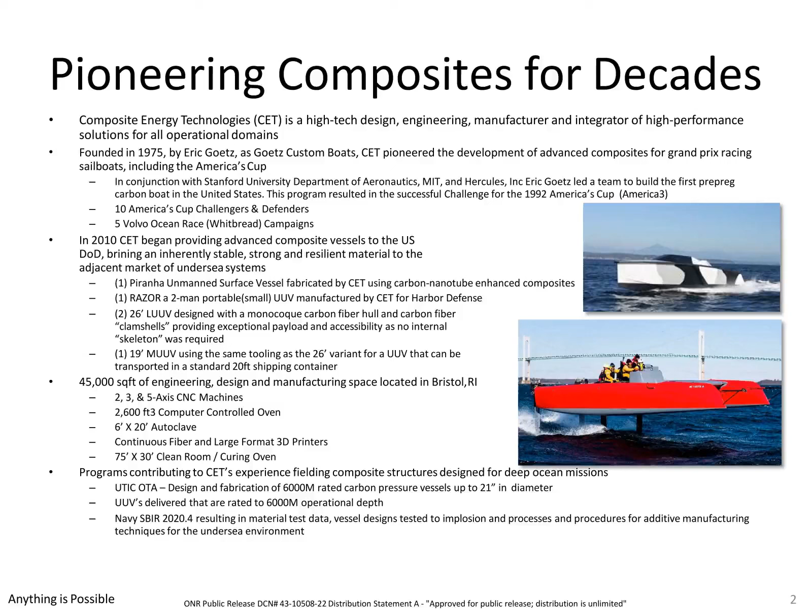Operating out of a 45,000 square foot engineering and production facility, CET continues to advance the science and practical application of carbon fiber technologies in the deep ocean environment. PMS 406 has outlined the Navy's strategy in deploying unmanned surface and subsurface vehicles with the goal of improving and maintaining the United States' competitive advantage in the naval environment.

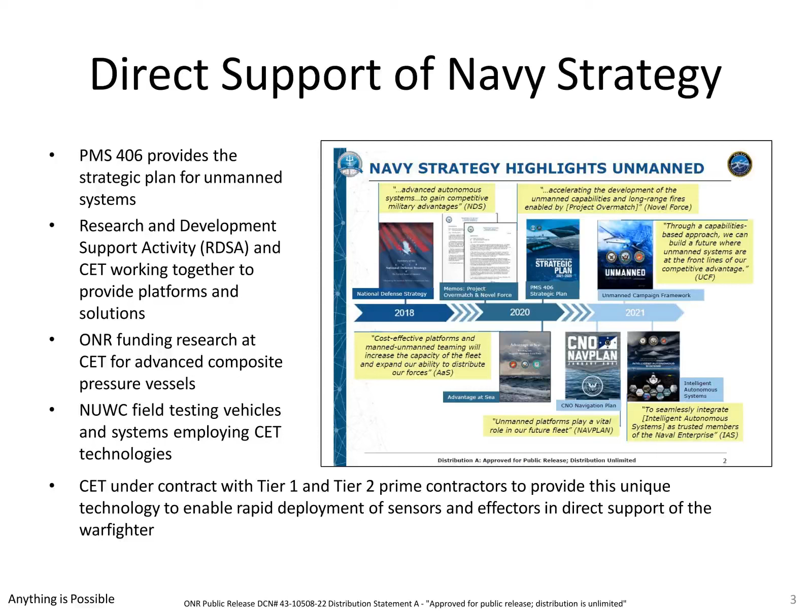CET is supporting ONR, RDSA, NUWC and a number of the Tier 1 and Tier 2 prime contractors to accelerate the design and delivery of carbon fiber vehicles and pressure vessels. This capabilities-based approach has focused on solving complex problems through a robust design, build, test, and iterate cycle that allows solutions that meet the needs of the warfighter to be rapidly deployed. Over the past decade plus, CET has pioneered the use of carbon fiber and other laminates in support of the Navy's strategy for unmanned vessels, just as Eric and his team did for Grand Prix sailing in the early 70s.

Based on the expertise built over decades of leading-edge development in advanced composites, CET has begun the process of developing design principles and manufacturing processes that can be used to streamline the design, production, deployment loop in a sustainable way, using the most advanced finite element analysis modeling available for composites, coupled with research done in conjunction with Johns Hopkins, URI, and Woods Hole Oceanographic Institute. It allows CET to quickly and confidently design structures and vessels that meet the unique demands of the undersea environment.

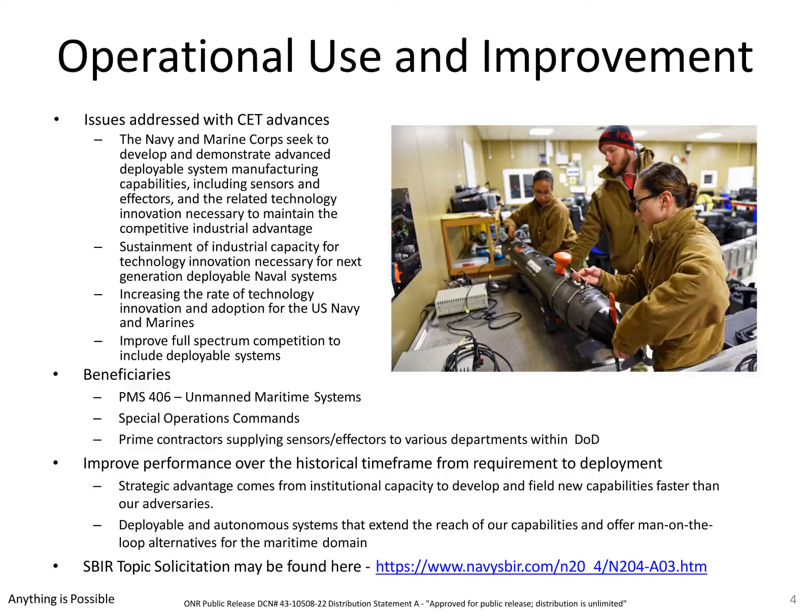Using newly developed materials and increasingly available production methods, such as additive manufacturing, CET can translate from requirements to solution in months rather than what has typically taken years. As both material and additive manufacturing technologies advance, the design deployment cycle will shrink to days and weeks, allowing production to move from purpose-built facilities to at or near the front lines. CET has been working with our partners and customers to quickly step through the design, produce, test, and iterate cycle during this SBIR, as well as in the other areas where we support the DoD.

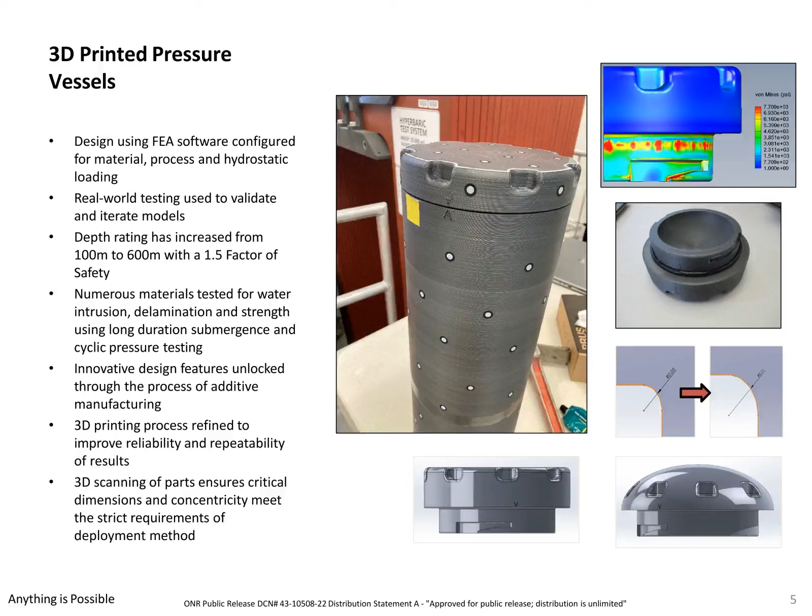Analysis of the results of real-world testing has allowed us to improve and validate our FEA models and point to areas that need to be improved to accomplish deeper depths. We have used and rejected materials that testing proved to be unsuitable for the environment and altered our design approach for end caps and tubes based on the failure modes of tested units. Currently, we have successfully tested a 3D printed pressure vessel to over 900 meters of depth, providing a working depth of 600 meters with a factor of safety of 1.5.

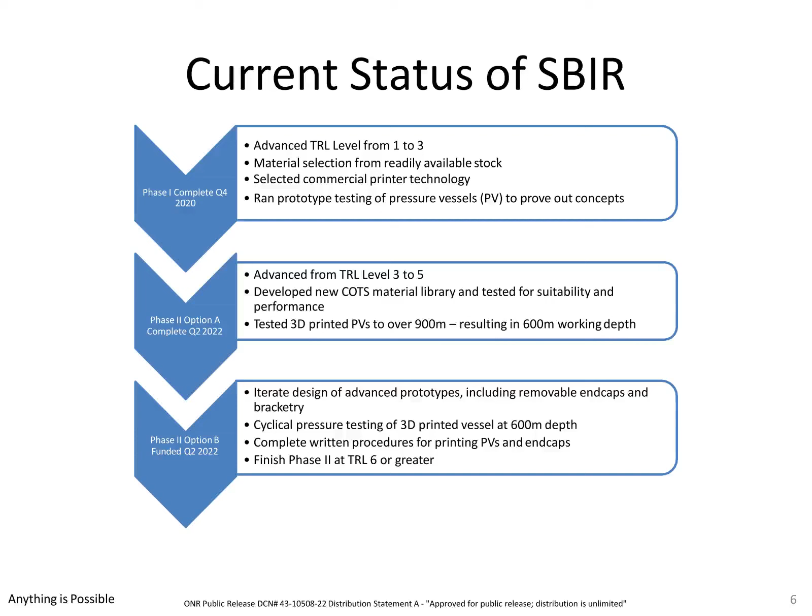CET is currently in Phase 2, Option B of this SBIR. Over the next few months, we will improve the design and performance of our removable end caps, conduct cyclical testing of our 3D printed pressure vessel at 600 meters, and finalize the written procedures for printing our designs using readily available materials and printers.

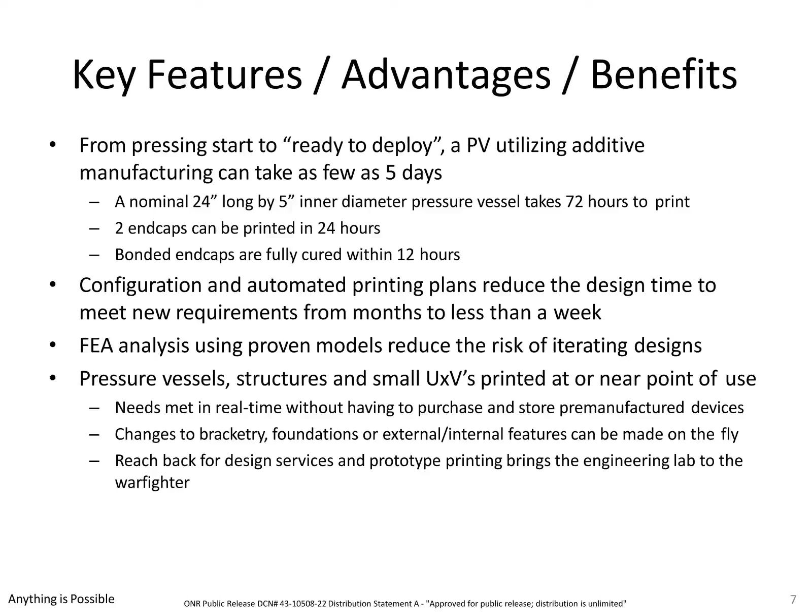The benefit of using an additive manufacturing approach to the production of composite pressure vessels and other structures is the speed of production. However, having the upfront engineering with the FEA analysis to support the design efforts is critical to the success of this approach. As available materials and new additive technologies emerge, CET will incorporate the benefits into the material cards or processes to enhance and expand product offerings. In order to continue as a leader in introducing composite structures and innovative production options to the U.S. DoD, CET continues to expand our network of collaborators, partners, and supporters.

In 2022, CET signed a cooperative research and development agreement with Oak Ridge National Laboratory to incorporate more robust additive manufacturing techniques and machines into our portfolio. Our work with Oak Ridge will allow our proven pressure vessel design to be manufactured with continuous carbon fiber material via robotic arms fitted with additive manufacturing heads. The procedures for translating the design to tool paths for the robotic arm will be vetted and proven during this process. Capturing and refining the procedures will allow CET and others to reliably reproduce the results.

The pressure vessels made with Oak Ridge will then be tested using the same procedures as our current pressure vessels. This direct comparison of the optimized material and processes used at Oak Ridge against our proven design will allow CET to assess the benefits the advanced material and production methods provide. This effort will help inform our next steps in bringing increasingly capable and affordable pressure vessels and composite structures to the front lines.

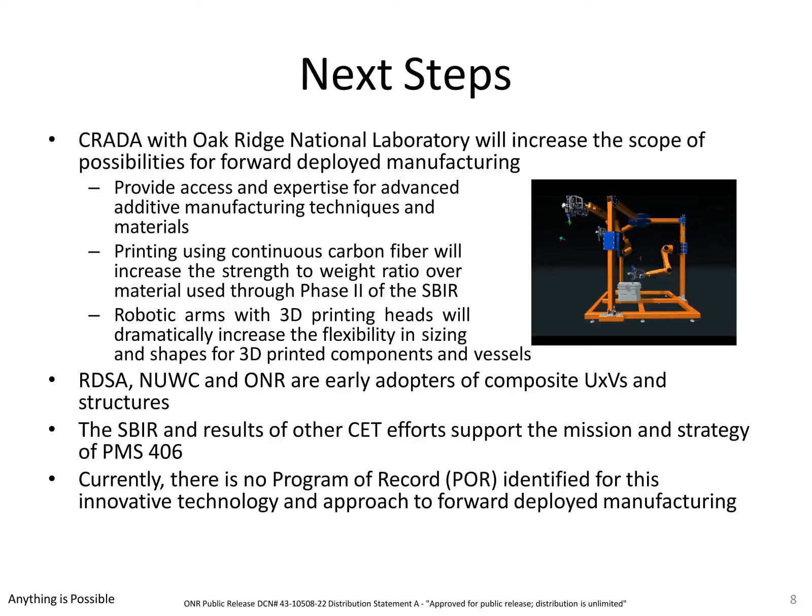Pioneering a new approach to solving existing and emerging issues is exactly what this SBIR topic was for. Translating the lessons learned from decades of offshore sailboat design to the harshest environment on Earth provided a great opportunity to reset the expectations of composite performance at deep ocean depths. Proving the approach with a rigorous design, build, test, and iterate cycle clearly demonstrated the benefits of composite structures in meeting the unmanned vessel strategy of the United States Navy.

To continue the transition of this technology to full production, CET seeks partners that are ready to present challenges and opportunities where an advanced composite solution and speed to market will provide a clear competitive advantage to your department or company.